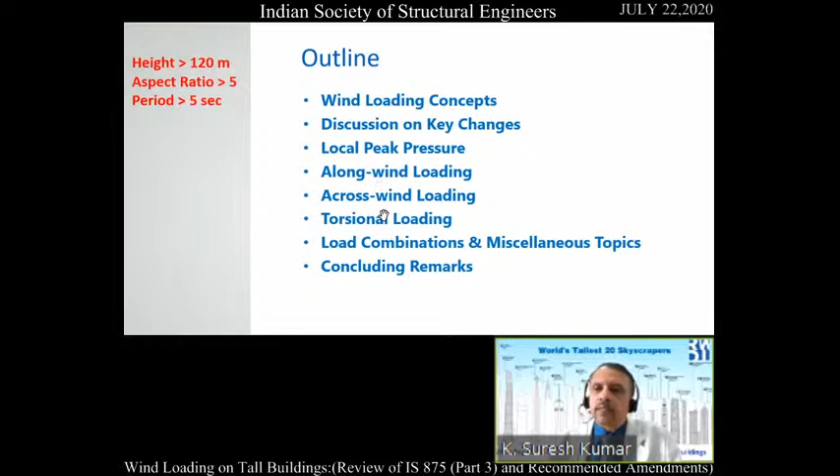So let us start, with all your permission. First of all, wind loading concepts. The code is built based on this particular concept. How do you assess wind loading on any tall building? You need certain things to calculate wind loading on tall buildings, and this is the way the code is built.

You need wind speed and direction, particularly meteorological data coming out of airports. Then you need terrain roughness data in terms of oncoming flow field turbulence. Depending on whether you are in Mumbai city middle or closer to the ocean, the terrain roughness is different, which will alter the loading on your building. This is already addressed in the code, like Cat 1 to Cat 4 terrain conditions with turbulence intensities and profiles.

The final aspect is the most crucial thing, local wind turbulence. There are a number of different turbulences affecting the building, not only the oncoming flow field turbulence, but also something called wake turbulence, which we'll talk more about shortly. We also have self-induced turbulence, which I'll discuss, and motion-induced turbulence, which is more like what we call inertial loading or resonant loading in terminology.

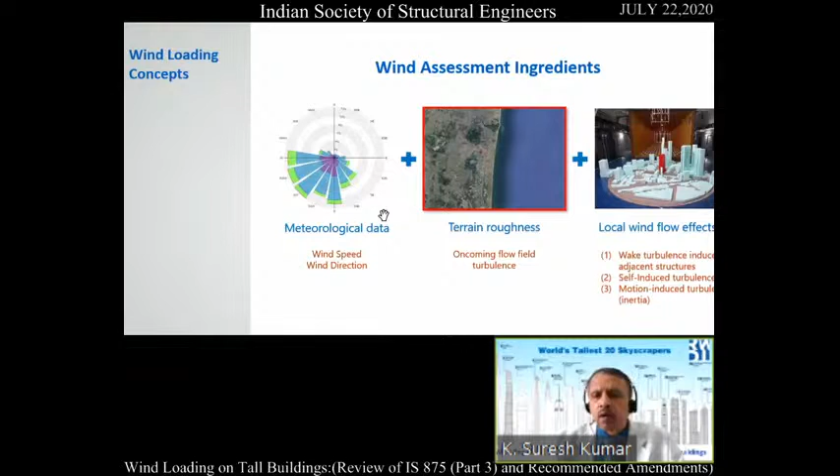So what is wake turbulence? You can look at some of these photos I'm showing on the sides and at the bottom, with the cities written. Nowadays no tall building is coming up without another building beside it. There is always a cluster of buildings, with the building coming in between, towards the edge, or wherever. You can see different cities showing clusters of buildings, with one building coming up in the middle.

So the wake of all these buildings, when wind is blowing, this wake turbulence is affecting your subjected building. That is something very important.

The last photo I am showing is Mumbai city itself, one of the projects we simulated in our tunnel. Look at these equations at the top. You can see PD, which I think you're all aware of from IS 875 - P bar D, the mean reference pressure as well as design pressure with respect to the peak wind velocity. That includes wind speed, wind direction, and terrain height multiplication factor - earlier I said 3 factors. Out of those 3, meteorology and terrain roughness are already accounted for in PD or P bar D.

So local turbulence has to be accounted for using factors like CPE, the external pressure coefficient, and CFZ and G, which are supposed to take care of wake turbulence. CFZ is nothing but the drag coefficient, and G is the gust factor.

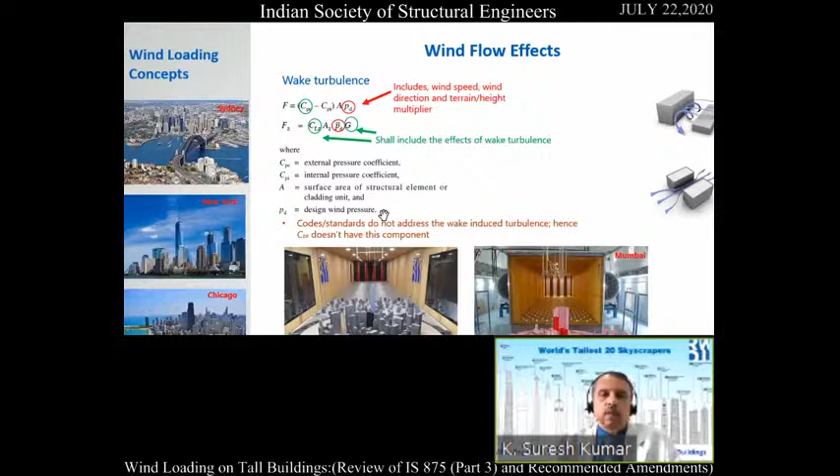Now the self-induced turbulence - what is meant by this? You can see the shapes of buildings coming up: Burj Khalifa getting tapered with steps, Shanghai Tower getting twisted, some low-rise structures with very complicated shapes, a tall tower in Vietnam with lots of steps, and the Statue of Unity, which also has a complicated shape. So the shape is doing a lot of things.

Typically the code addresses standard shapes - squares, rectangles, triangles, familiar shapes. But structures are not happening that way nowadays. Everybody is coming with new designs, so you see a wide variety of shapes, and what these shapes are doing, we don't know.

So can CFZ and G take care of self-induced turbulence? Again, the answer is no - it cannot, unless it's a standard shape. We are missing that in the code; it cannot address that. That is another reason why we do wind tunnel tests.

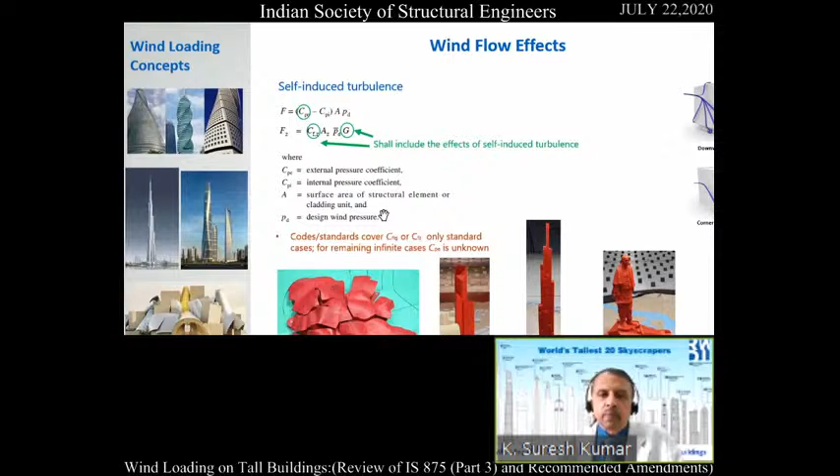The last point is motion-induced turbulence. In the equations, G, the gust factor, is supposed to take care of motion-induced turbulence. But G doesn't only take care of motion-induced turbulence, it also takes care of background turbulence. So you have two components there: background and resonance - this is the motion-induced case. The background is basically the oncoming turbulence case, also taken care of through G.

So essentially what you're doing in the code is calculating the mean load using CFZ, AZ, and PD bar - that gives you the mean loading. After calculating the mean loading, you multiply by G to get the peak loading. It's a very simple equation, and it's been widely used in most codes - we are not the only ones using it. You'll see after a while who else uses some of these equations. This gives you an idea about how the code is built.

So conceptually there are three components: one is meteorology, second is profile, third is local turbulence.

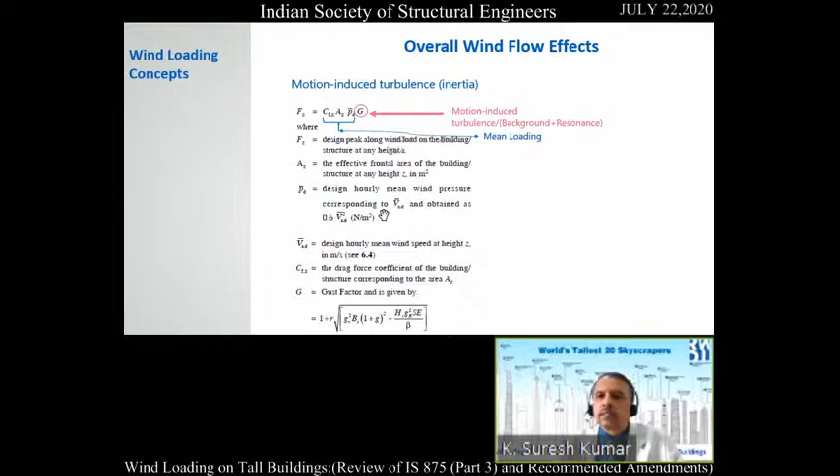So we don't know exactly what is the reason behind that, because I thought we are closely following the Australian code in some of these parameters. Many things currently in IS 875:2015 are coming from the Australian code. So why this difference exists, I can't answer here. This is something we should be thinking about at a later date when we try to amend this code again. So there is a difference between the mean profiles of the codes.

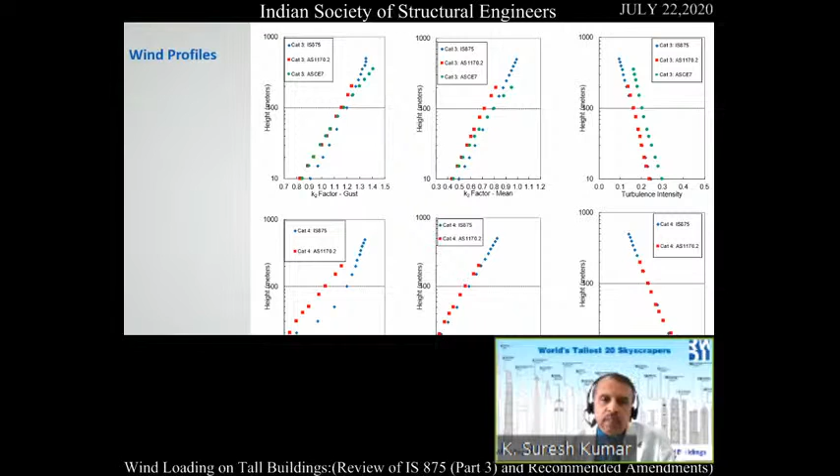So why this is happening is again a question mark, because our roughness length is exactly the same as the Australian code, since we use roughness length nowadays with Z-naughts from 0.002 to 2 meters. 2 meters we are using in Cat 4 terrain. So this is something to be questioned, because this is going to directly affect our reference pressure, which is very important.

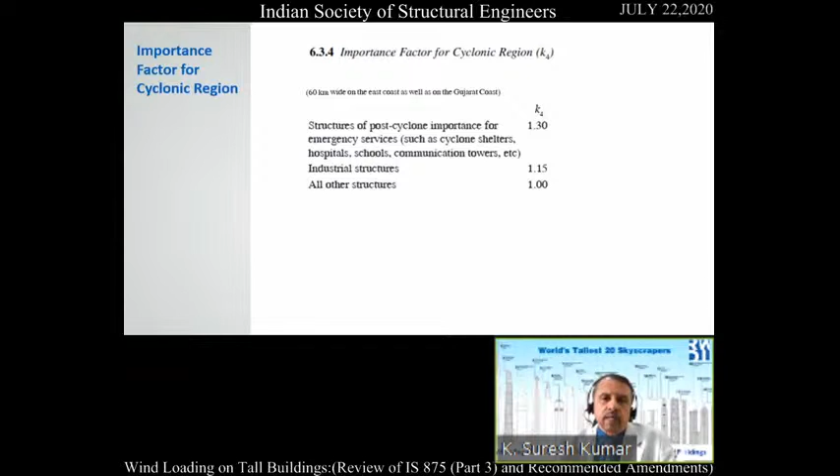And now we also brought in cyclonic factors. I have given another webinar exclusively for cyclonic factors, so I'm not going to get into the details. Basically what we are saying is at the coastal region, we want to elevate the speed using another factor, which is K4. They say that in post-cyclonic regions you increase the speed by 30%, and in industrial structures you increase it by 15%. Then all normal structures is 1.

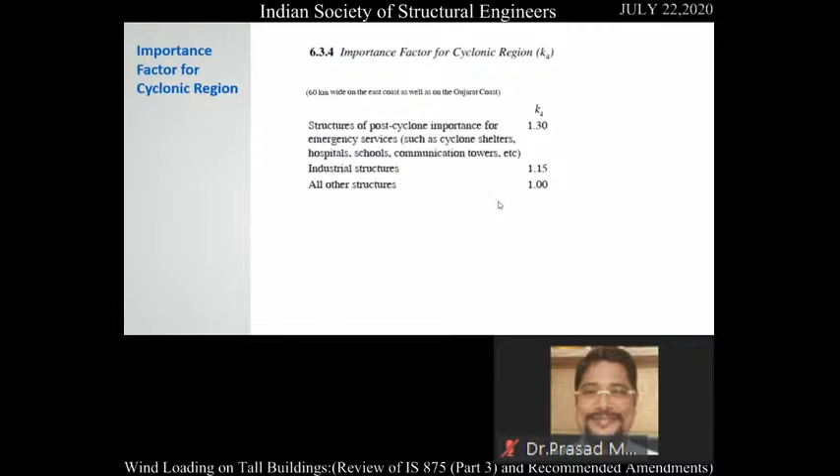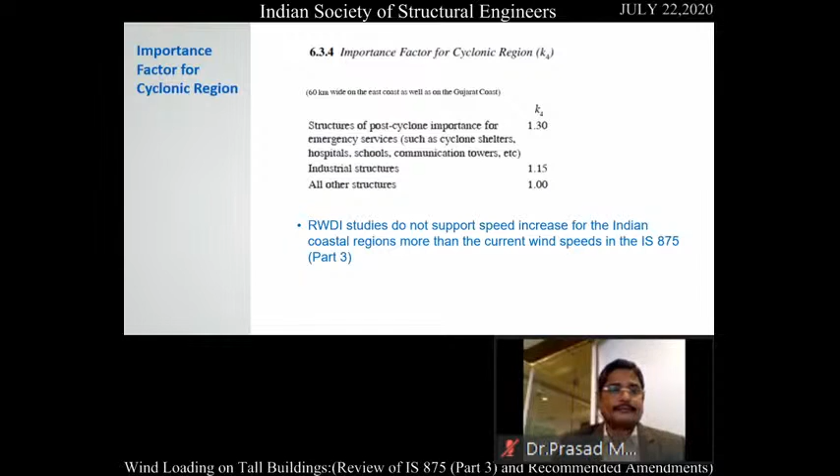So in such a case, we have looked at cyclonic simulations quite extensively, and what we found out is there is no speed increase as per our simulations. We are suggesting that no such increase is required, which is very clearly explained in the last webinar, so I'm not going to get into the details. Basically, our suggestion was to live with the K1 factor rather than bringing in another factor K4 into the picture. This is another suggestion which has already been discussed before.

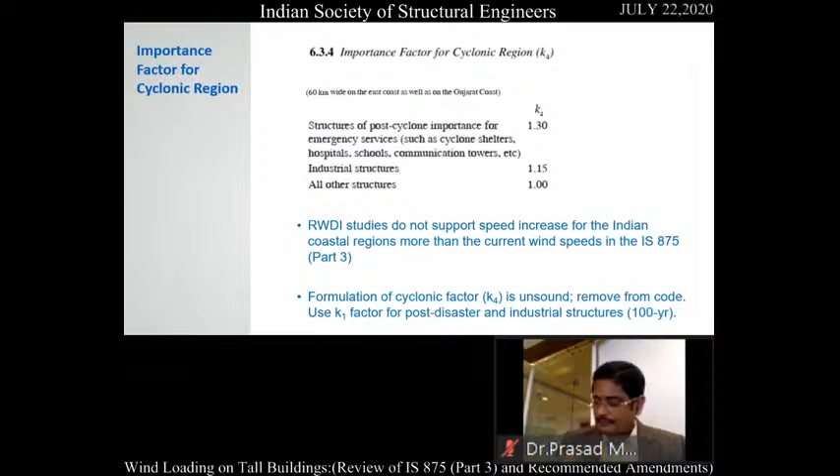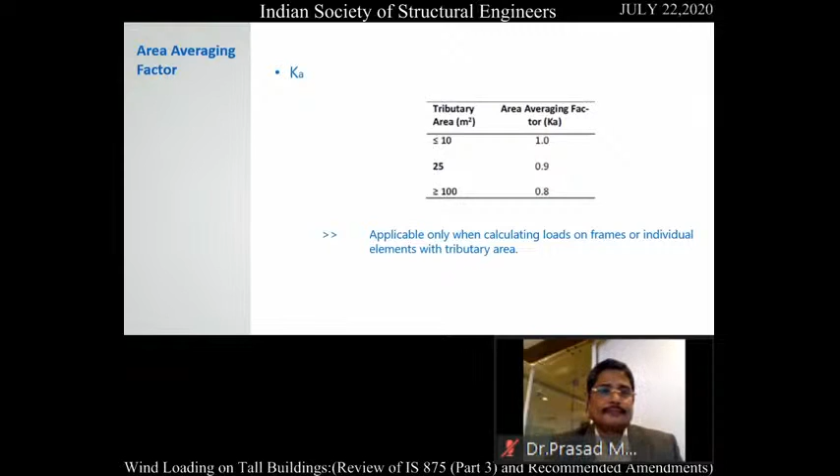And a few other factors coming into the picture, which is the area averaging factor, a table which is already in the code. This is something new. Basically it is applicable only when calculating loads on frames. When calculating loads on walls or with some tributary area, you can reduce the loads, which makes sense, and it is also in the Australian code with exactly the same ratios. So larger the area, lower the load.

Why? Because you have lack of correlation of pressures happening in a very large area. That is the reason we are trying to reduce the load. So this can be utilized when you calculate loads on roofs and loads on walls. It is possible to utilize this particular factor. But we shouldn't use this factor for calculating lateral loads on tall buildings. These things are not clear right now in the code, so probably we want to make it clear next time we do the amendment. That is why I brought this in.

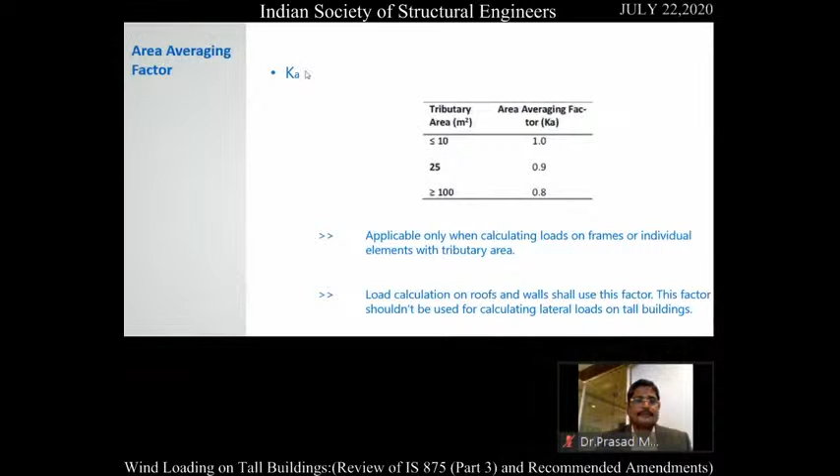Now the combination factor, this is something new that came up as well. The combination factor KC of 0.9 is recommended when combining external pressure with internal pressure. When you calculate loads on walls and roofs, you are combining external with internal. What is happening is the external and internal pressures are not happening at the same time, and again, that is lack of correlation.

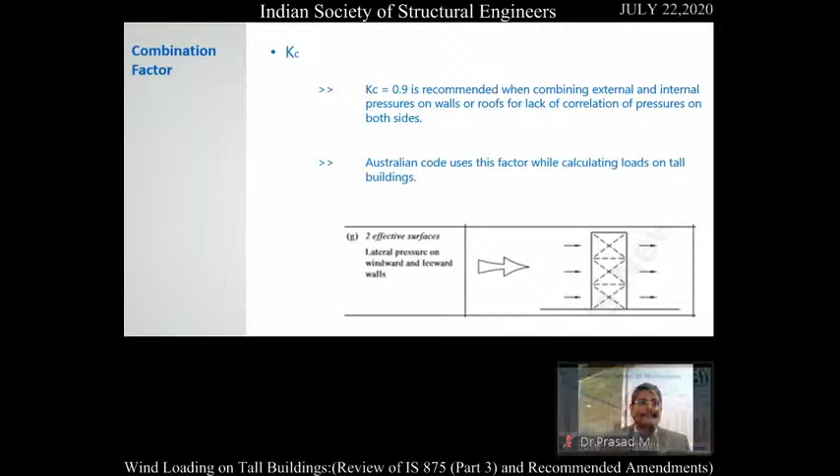So it makes perfect sense to use 0.9, but we have kind of limited it to only this. We didn't talk too much about whether we can utilize this for lateral loading or not. But the Australian code is very clear. They have a big table on KC where the 0.9 can even be applicable in finding lateral loads. That means a 10% reduction is possible. This is something we should be thinking about in the future. I would recommend utilizing this even for finding lateral loads on tall buildings.

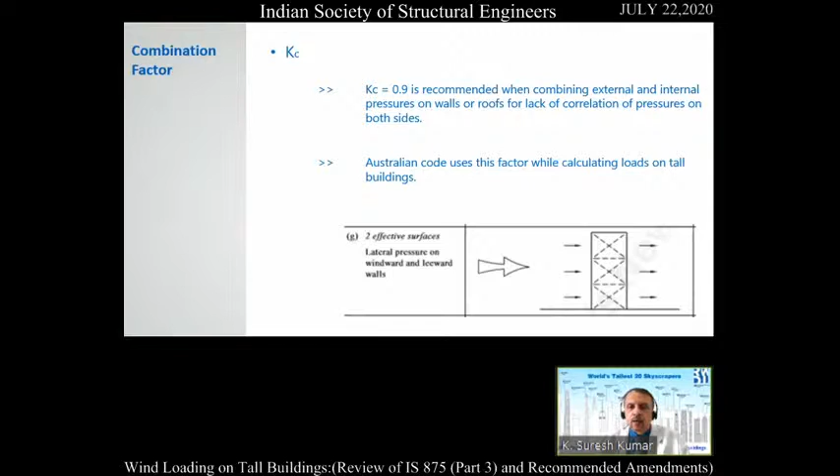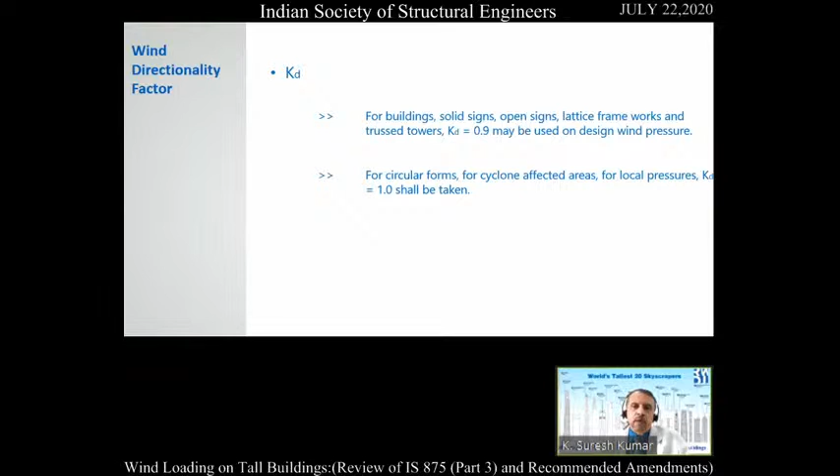KD factor is something new we brought in, and we say that 0.9 can be utilized, whereas the American code uses 0.85. So we said 10% reduction. For circular forms and cyclone-affected areas, as well as local pressure calculations, we should not be using KD of 0.9 — the code is insisting we use 1. I would say this is another area we should be thinking about, and in my opinion, regardless of this, there is still a reduction possible. That is something we should be thinking about in the future as well.

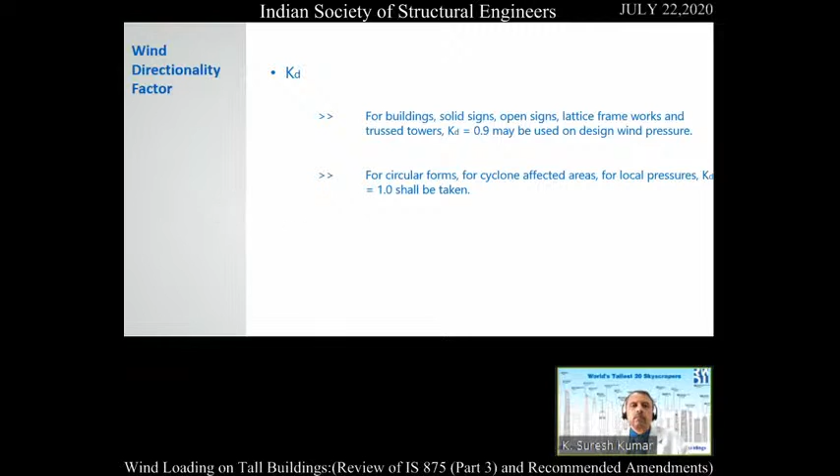Interference factor is something new, again, brought in. I think I got a number of calls on interference factor, accounting for basically amplifying the load because of another building in front of your building.

This is more like wake turbulence. But unfortunately, the trouble here is there are lots of parameters influencing this - the shape of the building, the distance between buildings, the terrain, you name it. There are so many factors influencing it, which is why it is kind of difficult to codify this, in my opinion.

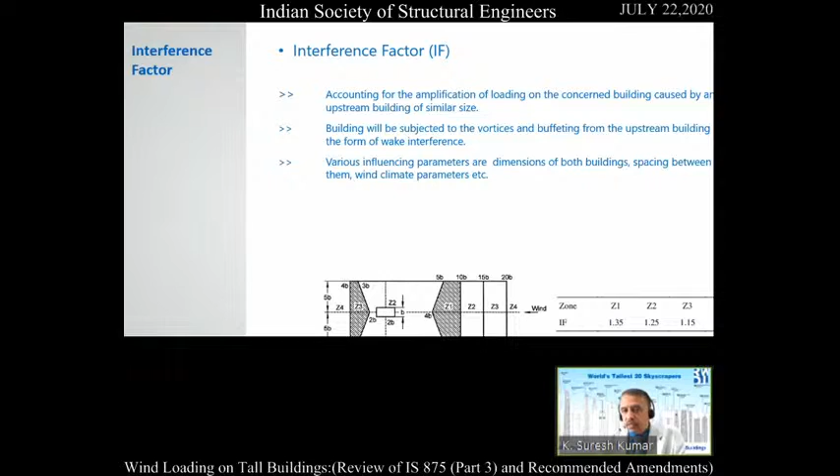Another problem is, in reality, seldom do two tall buildings have interference taking place in the field. So how many times are we going to see only two tall buildings? Very, very seldom. So that is another issue.

The earlier version of the Australian code had this stuff in their code - I'm talking about 1989. Then they moved it to the handbook for reference, basically. So if you want, you can use it, or try to do some preliminary estimations.

But I strongly say that in some of these numbers, which are also in the code, like Z3 and Z4 zones, it is too high, in my opinion, based on my experience with wind tunnel testing. All I can suggest is wind tunnel testing is the only solution to find out the real interference factor. If you use these factors already in the code to estimate loads, I'm quite sure this is going to result in super high loads.

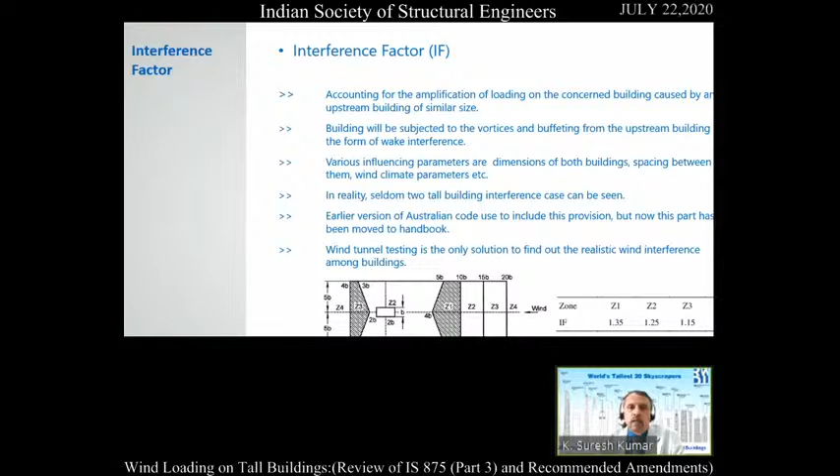Now I move on to local peak pressures. There are a number of things to cover.

My interest is more on Table 5. Table 5 has a local CPE factor ranging from -0.8 to -1.25. We have only one zone, basically, to calculate the peak pressure. We don't have a positive value as well, which is also important as far as framing is concerned, and that's not there in the code.

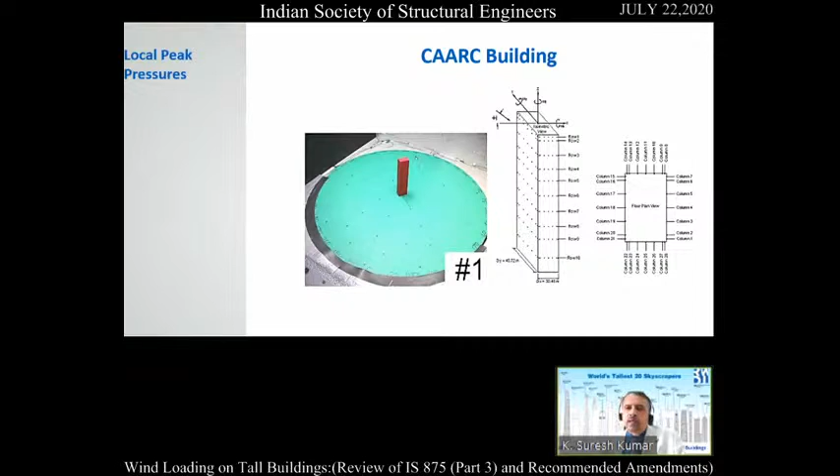We have done some CAARC building model tests - a very standard building model test that has been utilized all over the world. What we found from these tests is that the factors are very high in comparison to the code, especially on edges. We looked at the edges and found values of the order of 1.8, 1.5, even 2.4 - those are kind of isolated hotspots.

I also compared against ASCE 7 as well as the Australian code. The Australian code ranges from -1 to -1.95, while ASCE 7 goes from about -0.9 to -1.8. So they all have two regions, one for the middle, one for the edge. The edge is always subjected to higher suctions.

But unfortunately, in the Indian code, we have only one value throughout the facade. So what this shows is basically that it is underestimating the load at the edges. That is one of the issues we talked about earlier as well.

We looked at positive values as well. When you look at positive values, we are okay - if you use 1.2 positive for the facade, all over the facade, it is good for design, but we have to put it in the code.

We looked at a number of buildings - I'm just showing a sample of 4 buildings. You can see the wind tunnel range versus IS. The wind tunnel range for the first building is from -2.25 to -3 in the majority of places, with isolated spots getting -3.75. And IS is giving -2.23.

You can see the rest of them everywhere - our peak loads from the code are much lower than what is being found from the wind tunnel. You can also compare these values against ASCE 7, and you can see those values are in match with the wind tunnel, or match, or slightly different, but very close.

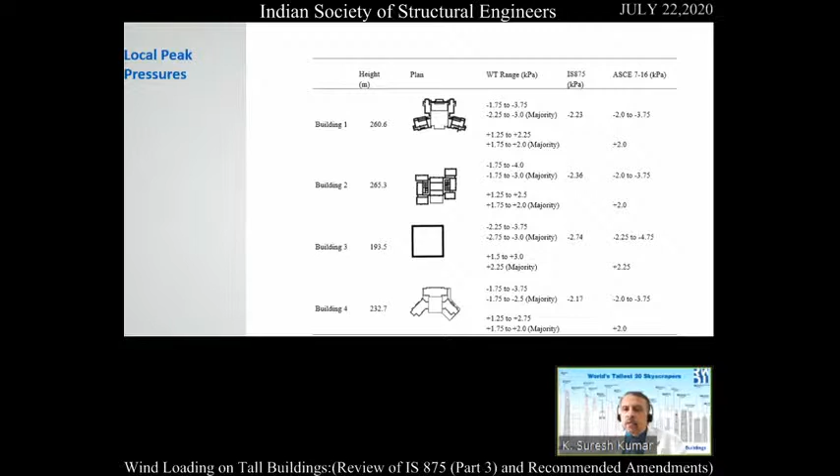So this is the reason why I'm saying the edges are underestimated. The loads are underestimated at present in the code. So we need to bring out another table or introduce a new zone, etc.

So I'm putting an amendment here for you. I'm showing that the positive values we can put from 0.8 to 1.25. The negative, for the general zone, we can put exactly what the code is suggesting right now, minus 0.8 to minus 1.25. But the edge zone, we cannot use minus 0.8 to minus 1.25. We have to go from minus 1.2 to minus 1.8.

That means for tall buildings, we'll be using minus 1.8, which is identical to ASCE 7. We have all the proof. We are not going exactly equal to the Australian code. Australian code is even higher, at minus 1.95.

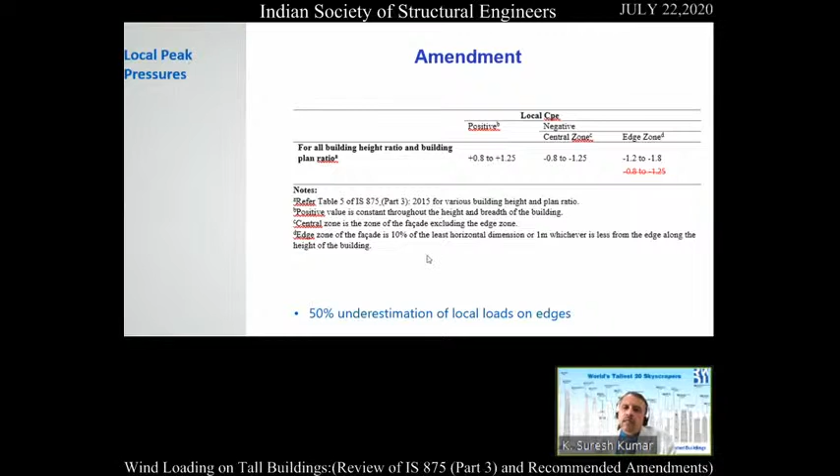We probably don't have to go there, but we have sufficient proof for this. And what the edge zone means is approximately 10% of the least horizontal dimension or 1 meter, whichever is less. So the closest edge is something debatable, which we can discuss later. Probably I don't want to discuss too much at this point. The point here is the edges are already underestimated in the code.

Now I move on to along-wind loading. So now we are getting into the structural aspects of the presentation. Along-wind loading basically means the wind is pushing the building, which is oscillating in the direction of the wind.

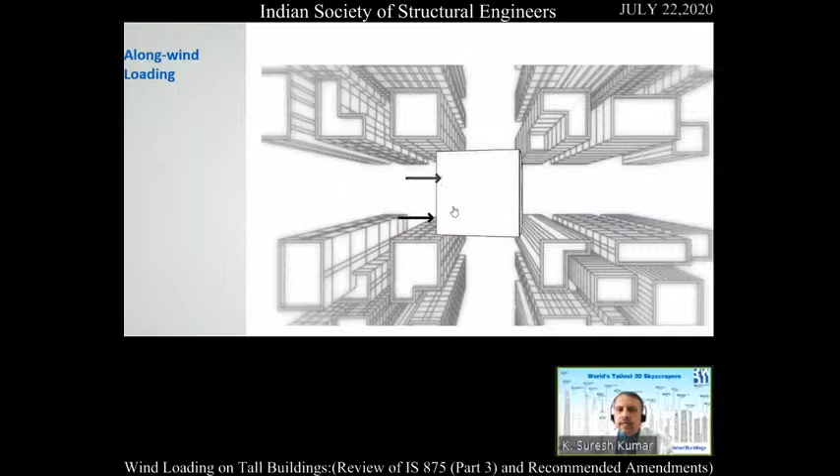There are three components: mean, background, and resonant. The background and resonant are the fluctuating components, and this is the mean component. The code is built basically according to this equation: gust factor equals peak along-wind loading divided by mean along-wind loading. Very simple. So once you find the mean along-wind loading, just multiply with the gust factor and you get the peak along-wind loading. It is as simple as that.

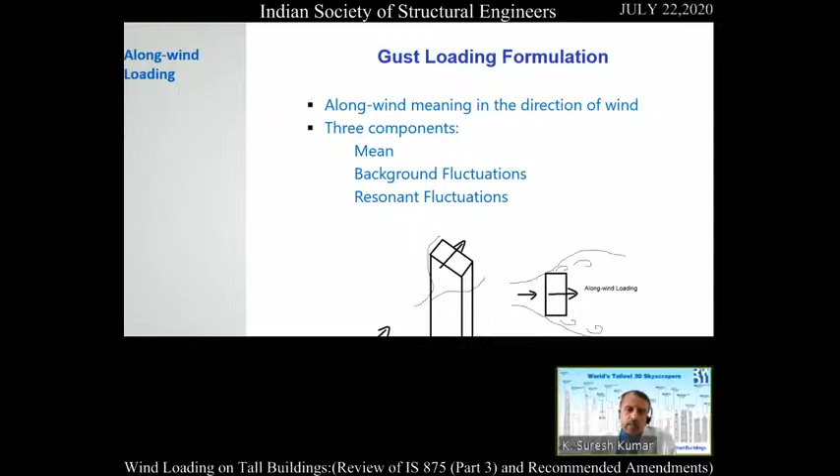So there is a great initiative, great formulation, there is no doubt. Look at how we are working closely with other codes.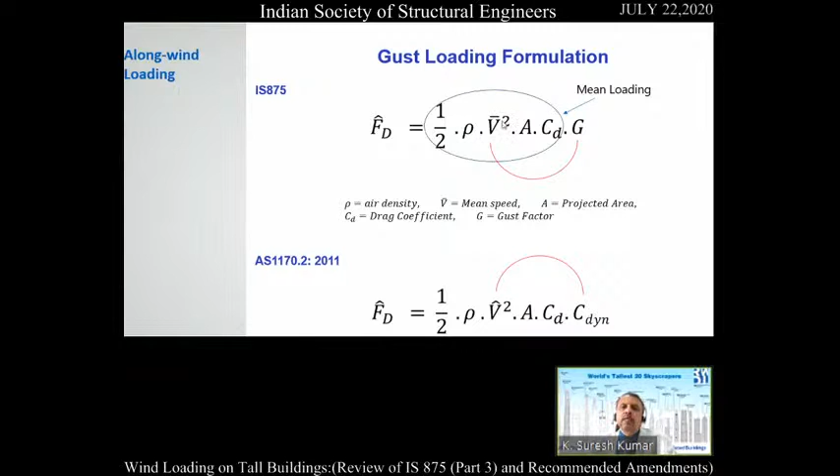The rest of the parameters are all the same. CD is supposed to be the same, even though there are differences, which is coming very soon that we'll be discussing. But essentially, the formulation is identical. There is no difference whether you use mean hourly speed or 3-second speed, but you cannot mix it easily. If you want to use this particular equation, take your V bar, convert it to V peak, then you can utilize this equation and still get the same answer. Or you can go backwards, just do the wind speed conversion, then utilize that particular equation.

This is probably the most important stuff from this presentation: force coefficient. This is figure 4 from our code. We went ahead and did even H by B infinity, H by B 20, etc., all the graphs. You can see around this region, A by B 0.5, 0.6 region, it is getting super high numbers, and these are very high CF coefficients.

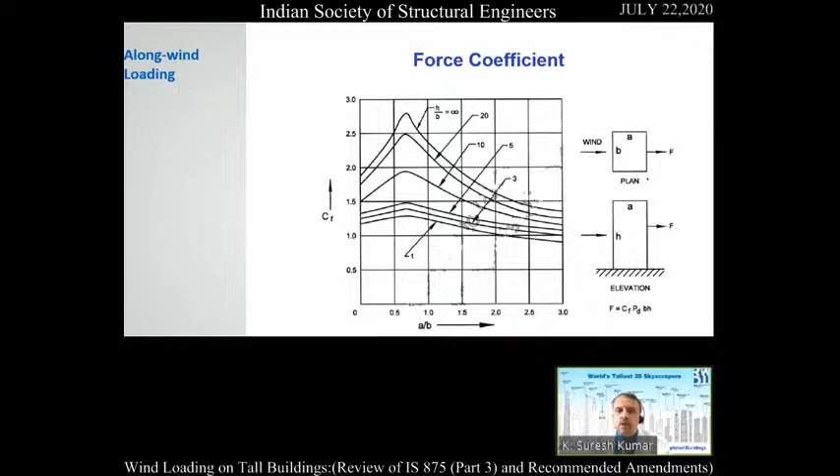This is not occurring in reality because we have been testing buildings for the last several decades. We have tested buildings up to aspect ratio 23 so far, and we have never seen anything like this, any coefficient behaving like this. So we have to immediately look at this, because otherwise we'll be overestimating loads, especially along wind loads on tall buildings. That is why I brought this stuff into the picture.

You can see what the Australian code and ASCE are doing. You can see H by B for all scenarios, and here height is limited to 200 meters. With A by B, the plan ratios, you can see the maximum is 1.3. That seemed to be a really good number, because based on the testing that we saw, also 1.3 is ultimate. You cannot get more than 1.3.

Unless you are super slender, or getting into 2D flow with no turbulence in mean uniform flow or something, there is a chance you can get higher. But otherwise, in boundary layer flow with normal H by B even up to 23 - and I'm telling you, 23 is the ultimate we have tested - you cannot get more than 1.3.

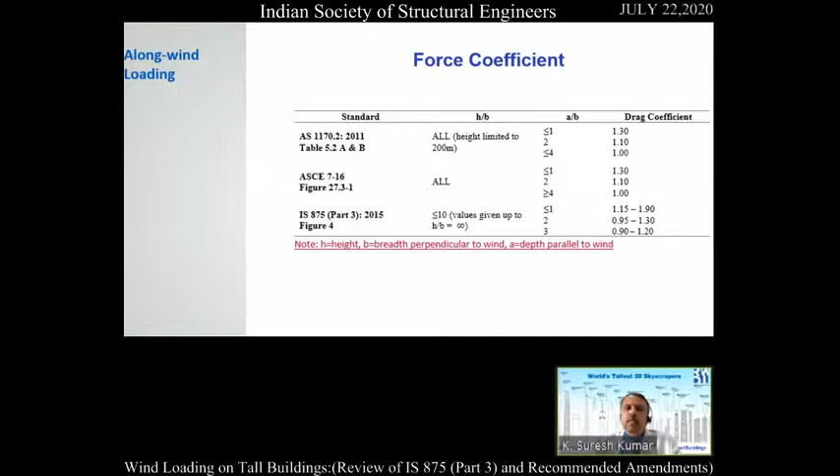So IS 875, look at where we are. I'm just putting only less than 10. If you go more than 10, what will happen? You can see from your graph itself, it is getting super high numbers. I think this is something we should be attentive to, and we should be changing this immediately.

I'm also putting another graph. This is a bit theoretical here because of the G. I'm focusing on the G. The gust factor has two components, and I want to focus on those two: one is background, another is resonant. It's very easy, we don't have to think about each parameter. Background is oncoming turbulence, and resonant is the inertial component, meaning the structure is interacting with the wind, pushing back and forth. That is what this resonance means.

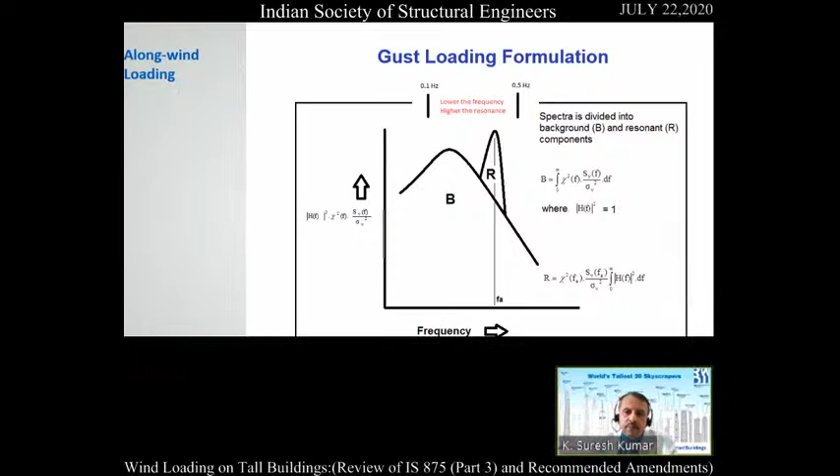Look at the gust factor equation between IS and Australian code. The left-hand side of IS 875 is background - oncoming flow turbulence and some self-induced turbulence - part of this equation. The right-hand side is resonance, motion-induced turbulence. If you look at the Australian code, it's exactly the same equation. The only thing is they have 1 + 2 G v I h on the other side.

Why do they have that? Because they are using peak 3-second speed for their calculation, while we are using mean hourly speed. They are using peak speed, so when using peak speed they should use that term. Essentially, underneath, there's an equation saying G is nothing but C dyn into 1 + 2 G v I h. So it's an identical equation - we don't have to worry about that. The only difference is we use mean hourly speed and they use 3-second speed.

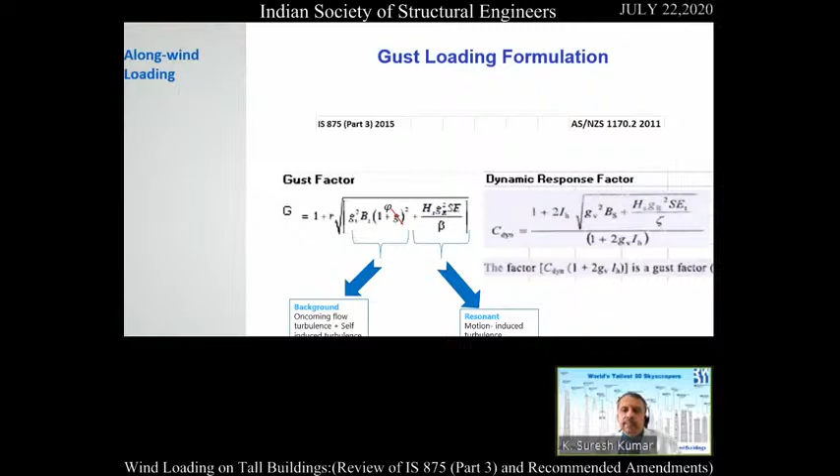So we don't have to worry too much about these equations. It's almost identical. Of course, there are some differences which I can't say why we made different - that's probably something we should discuss at the time of amendment.

There's an example for you: two buildings side by side, in Chennai, a fairly rectangular building. You can see what we got out of the wind tunnel - the wind tunnel numbers have an underline in red. Then you can see the IS 875 numbers, also underlined in red. You can see the wind tunnel result is slightly lower than IS, and that could be due to the surrounding structure, sheltering.

But look at the comparison between the codes - it's almost identical. So we are getting relatively similar numbers between the codes, which is great, as far as your CD is similar. If your CD or CF has a problem because of figure 4, then obviously this is not going to happen. So the formulation is all okay - we need to fix the CF.

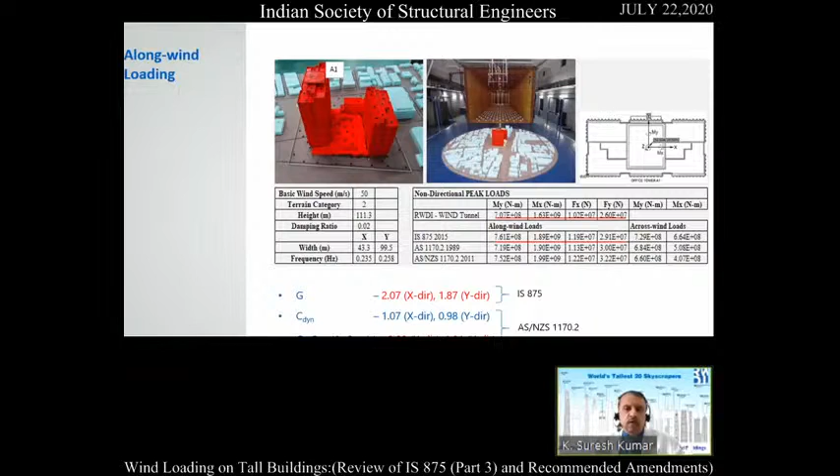Once you fix the CF, we are going to get identical numbers regardless of which code we use. I'm also putting the G from IS versus the G from AS - you can see again similar numbers. So we don't have any issue with the formulation of along wind, except slightly few differences here and there. Our problem in along wind is purely with CF, so that CF needs to be fixed.

Now the more interesting stuff on crosswind. This is something new which Dr. Prasad already mentioned in the code, and again we borrowed a number of things from the Australian code. So what is meant by crosswind? When the wind comes and hits the building, you get vortex shedding on both sides of the building, and as a result you get a crosswind oscillation. So in certain buildings, crosswind dominates and along wind is much, much lower. I can tell you, in certain cases, crosswind can be double or even more than along wind. So we need to be careful about the crosswind.

So the code came up with diagrams picked from the AS code. And when we tried to compare, I was being informed that we are continuously getting higher loads from the IS diagrams. That is when I compared and found out that the graphs have been shifted.

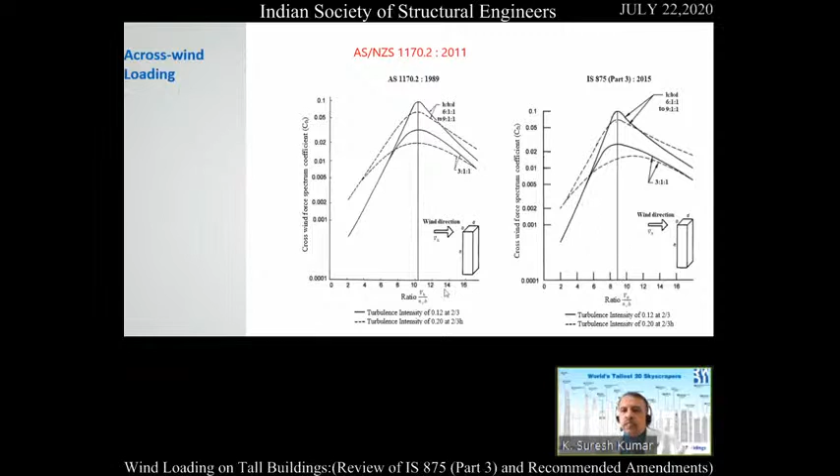You're supposed to get a peak at about 10, but we are getting a peak at below 9. As a result, we are getting too much higher load because our building lies between the 2 to 6 or 2 to 8 ratio region. Unfortunately, because the graph is shifted, we are getting a higher cross wind force spectrum coefficient, and that is causing the higher loading.

The interesting thing is, I do not know why, when we already have the 2011 code version available, we went back to the 1989 version and picked the graphs. That is something to be discussed, because we could have easily used the 2011 version code equations rather than these graphs, because these graphs are very dangerous. They are in log scale, and depending on the day and who is doing the calculation, you can come up with different numbers. That is why it is better to use equations rather than graphs.

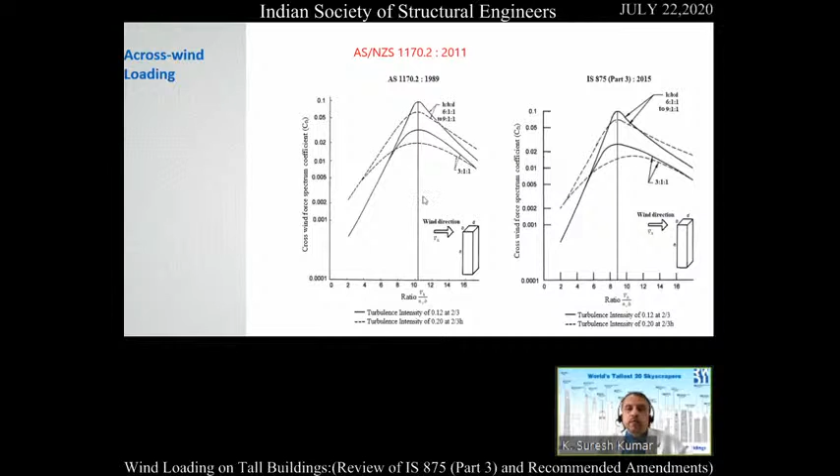We looked at a case, from Mumbai. This is a square building, approximately 160 meters tall. You can see the red line - again, the crosswind, IS crosswind versus the moments compared from the wind tunnel. It is double, more than double.

Then you compare the AS values underneath the red line, and you can see it is very, very close to the wind tunnel. Because this is more like a textbook type problem - you have a square structure without balconies etc. - you are supposed to be almost equal to the code. Of course, if some upstream structure is obstructing the flow, you're going to get different numbers, I agree. But otherwise, you should be getting very close.

So it is very clear why this is happening, because using the same equations from the same 1989 graph, I get very close numbers compared to the wind tunnel. And the same graph is used in IS 875, but just because it is being shifted, we are getting a higher number. But I'm not going backward on the 1989 version.

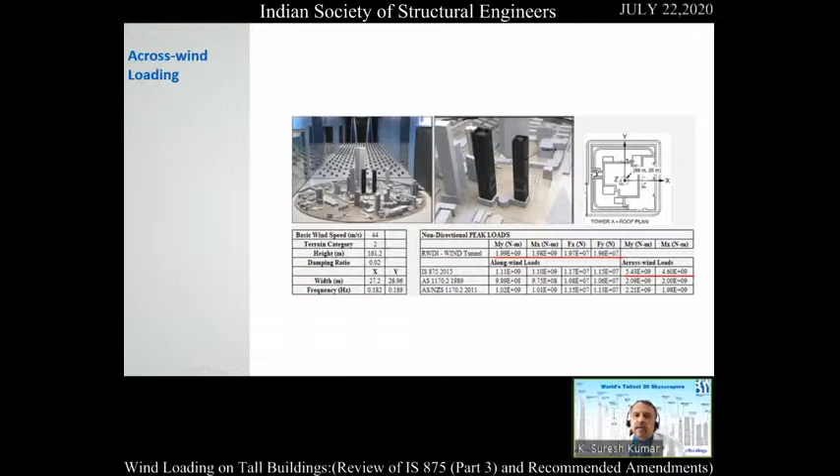I want to go a little bit forward and look at whether we can use the 2011 version of the code instead of the 1989 version. We can, and I am proving it right here, using the equation for across wind base overturning moment from the IS code versus the AS 1170.2. You can see a one-to-one comparison can be made.

You can see the pH is nothing but in their equation - this whole thing is just pH. And 3 by K plus 2 Km is nothing but 1.06 minus 0.06 K. So essentially, these two equations, 1 and 2, are identical. There is absolutely no difference.

So why can't we then use those equations instead of the graphs from 1989? Then everybody is going to get the same answer. Vn, which is the reduced velocity, Vh bar is nothing but V design divided by 1 plus GVIH. I'll leave it for your thoughts, and these presentations will be available.

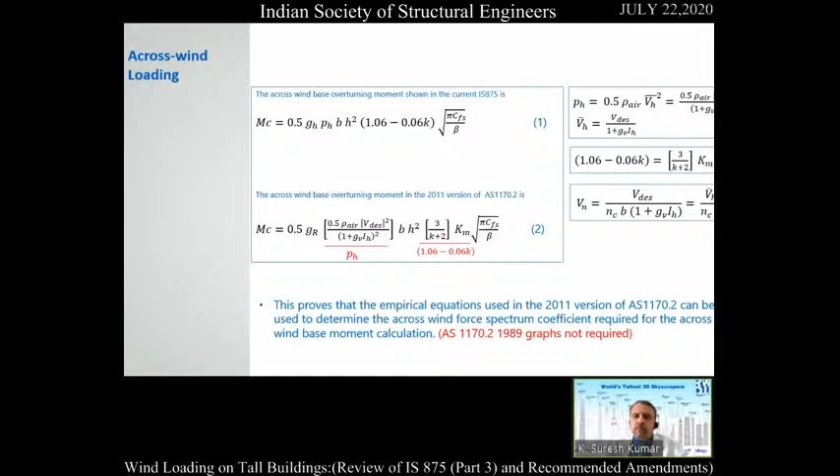You can go back and check these equations and try to comprehend them yourself. I'm 100% sure that you could utilize those equations, and those equations are beautiful. You can just plug in the numbers for Vn, and then immediately you'll get your CFS, and you can continue with your computation.

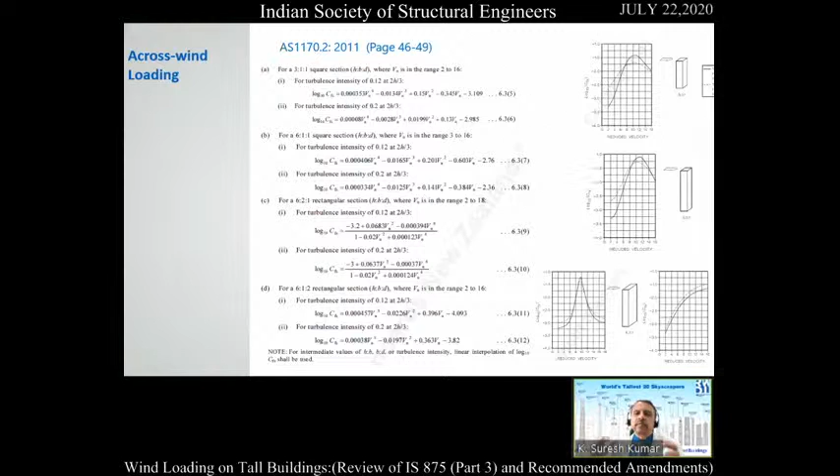These things are perfect, but I wanted to remind you - how many buildings are going to be rectangles and squares? That is a question I think we need to really look into, because every time you have a building with offsets, balconies, insets, and all of those things, all you're doing is taking Bx and By and plugging into this equation to get a CFS. But the wind is not going to probably be so forceful in those cases.

So look at a case - I wanted to also show some cases. Some of these buildings are really tall, 500 meters, 364 and 275 meters, with some interesting shapes. And in these buildings, if I use BX, BY and calculate, definitely I'm going to get crosswind. But aerodynamically, there is no crosswind on these buildings - basically along wind is governing just because of the shape.

So what I wanted to write in the code, or suggest for the code writers, is that depending on the shape, things are going to be different - it's not going to be the same. Another thing is immediate surroundings. Buildings don't come as single buildings, as you know, with lots of other buildings surrounding them. Then again, it will disturb the vortex and disturb the flow.

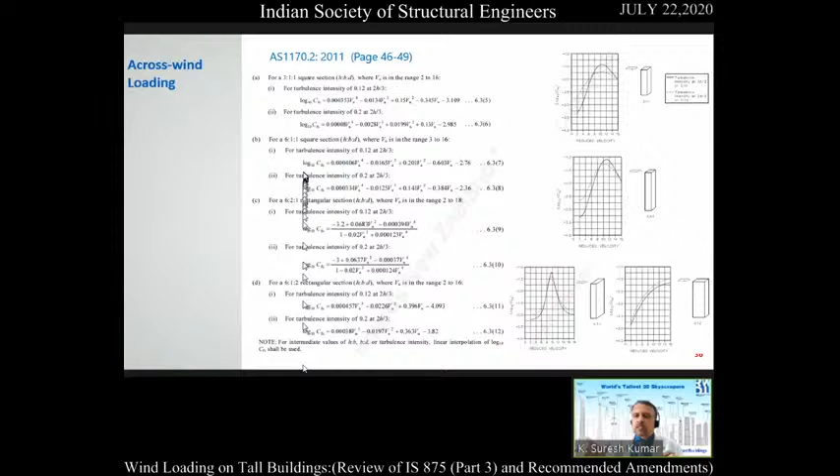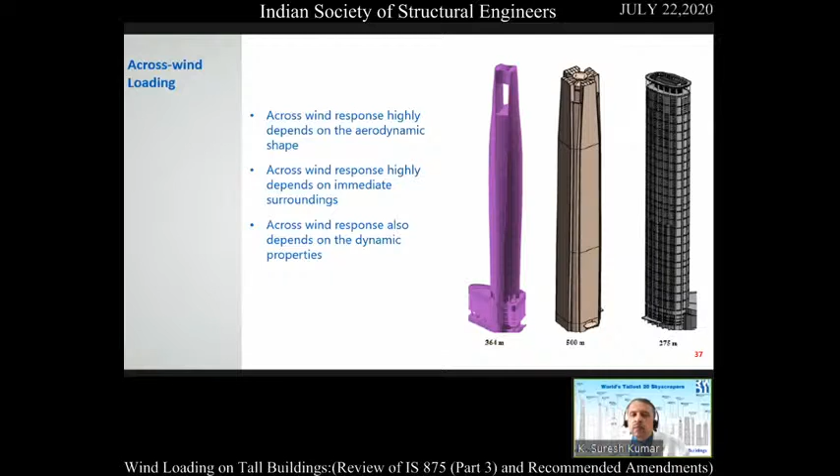And as a result, your crosswind is going to go down. Dynamic properties have an influence too. So I want to caution you, when calculating crosswind, you have to account for the shape, the surroundings, the properties, and then make a judgment call, which is kind of difficult. But we should not worry too much about those numbers. We wanted to comprehend more than those numbers and what could have been really happening in the field.

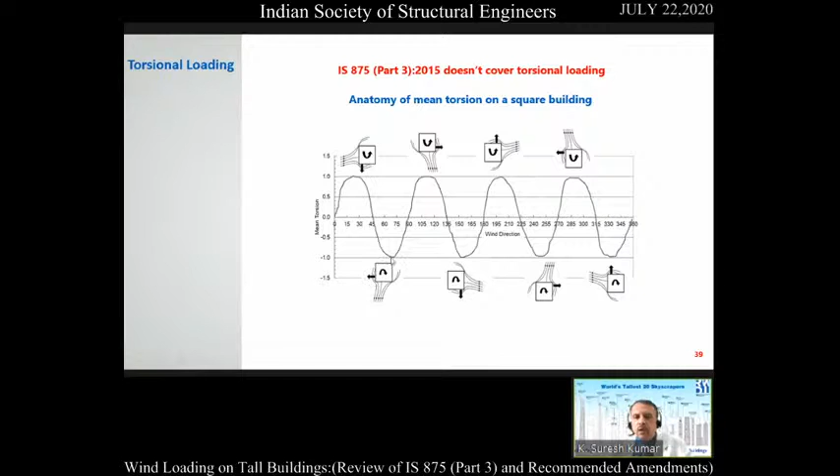Now, torsional loading. IS 875 is silent on torsional loading. I'm showing a graph of mean torsion happening on a square building. At a particular angle of attack, sharp separation happening at one corner tries to twist the building, giving positive torsion. When the flow comes from another angle, the separation happens at another face, and it alternatively twists in the opposite direction. It keeps going like a sinusoidal wave.

Basically in torsional calculation, the torsional eccentricity is a prime parameter. As buildings go from square to rectangle, the torsional eccentricity increases further, and your loading increases. Also, an L-shaped building, or a building surrounded by another building, will alter the flow and you can get a higher eccentricity.

I'm showing an example below with different buildings. From internal tests, we are getting eccentricity between 9 to 12% in these particular cases.

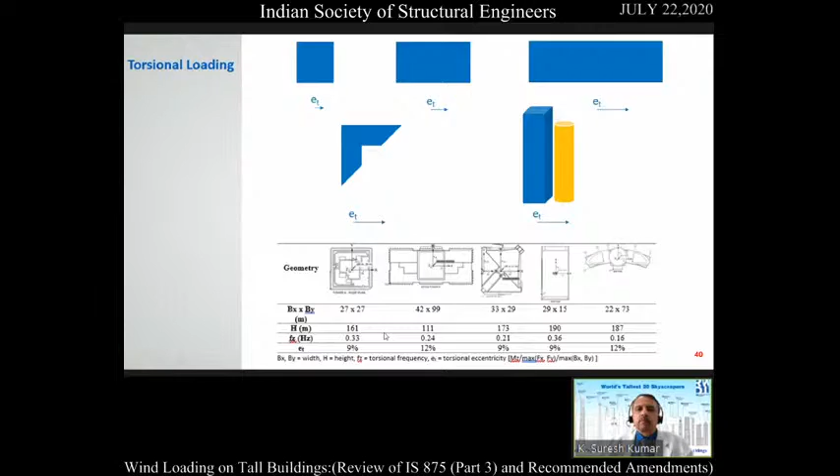You can calculate torsional loading with a simple equation. Take the maximum shear, Fx or Fy, multiply with the maximum Bx or By, which can be averaged throughout the height, then multiply with an eccentricity percentage. Based on my experience, that percentage varies from 5 to 25%, based on number of tests over the last several decades.

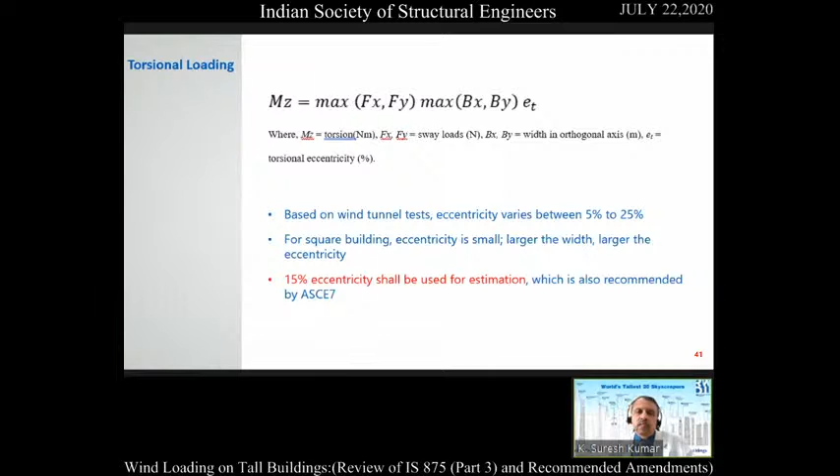Typically for a square building, eccentricity is small, and as the width gets larger, it increases. But we can't be playing with these things at the preliminary stage, so I would propose using a 15% eccentricity at the preliminary calculation stage, which is also suggested by ASCE 7.

Now the last bit: load combinations and some miscellaneous items. I'm showing ASCE 7, Australian code, and Indian code. In ASCE 7 diagrams, case 1, case 2, case 3, case 4 — in some cases they apply load only in one direction, 100%. In case 3, they use 2 sways but at 75% each. In case 2, they use 1 sway with torsion, with certain percentages. In case 4, they use 2 sways simultaneously at 56% with 100% torsion. This is very similar to what you'd get out of the tunnel too.

But I wanted to remind you that wind is not going to act like case 1, case 2, or case 3. When wind blows against your building, it definitely causes X loading, Y loading, and torsion loading simultaneously. The only question is on what proportion. That is what we need to answer, and we'll talk about that in a bit.

The Australian code says you separate the mean, then combine the fluctuations—the crosswind fluctuation and the along-wind fluctuation—take a square root of that, and add to the mean. Without torsion, that's the load combination they suggest.

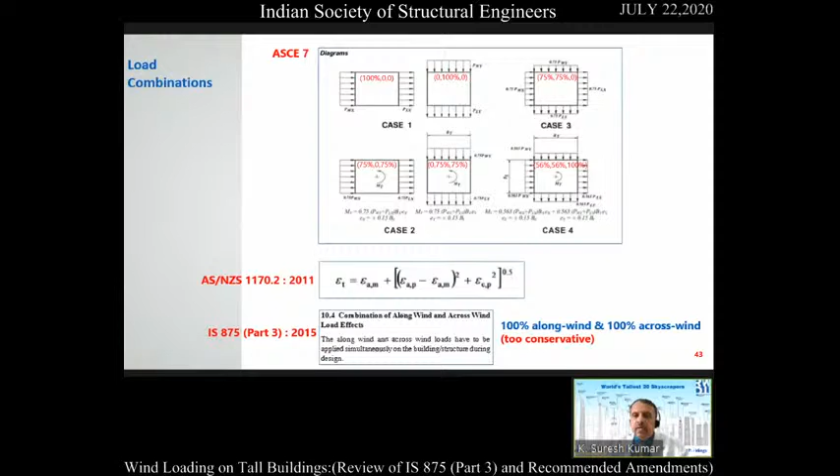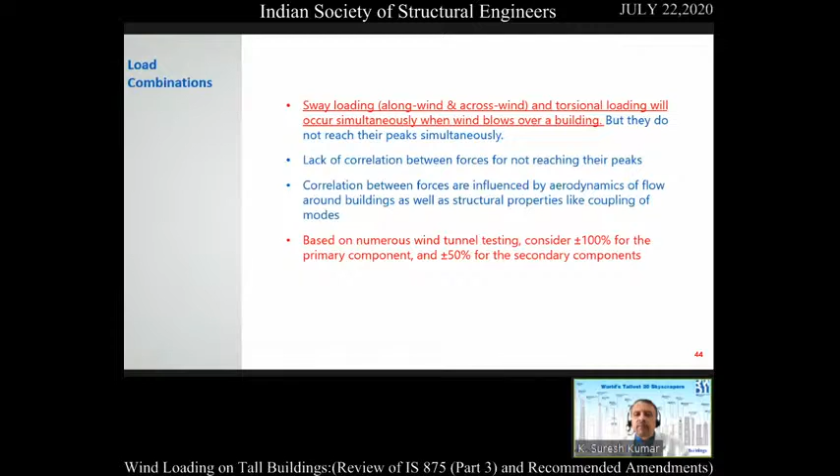Some of these points are written here: lack of correlation between forces at different directions. This is the point we want to raise. We have been testing buildings for the last several decades, and we have found ratios ranging all the way from 30% to 70% in some cases. But I would recommend using the primary component at 100% with 50% from other directions as secondary components. As a first-cut scenario, when you do the wind tunnel test, the secondary components can probably range anywhere from 30 to 60% or so.

A few more things. I wanted to stick with the time, not to exceed the time too much. So structural damping - there's a lot of confusion in this.

Depending on the code you look at, and depending on serviceability or strength and ultimate, etc. ASCE 7 now, as you know, 700 year to 3000 year return period, 300 year to 3000 year, suggests that for ultimate damping we can use 2.5% to 3%. The Australian code is very clear: RCC is 3% and steel is 2%.

Then with IS 875, you can see RCC is 2%, and steel is separated into bolted steel and welded steel. They also suggest pre-stressed concrete at 1.6%. In RWDI, we have been utilizing RCC at 2%. For this case, it's 50-year or 100-year return period, composite at 1.5% and steel at 1%.

And in serviceability also, there is confusion. Various numbers I'm proposing are here, like ASCE 7 and Australian standard as well as international. IS is kind of silent on that, and RWDI uses basically RCC 1.5%, and steel and composite we always use 1% as damping.

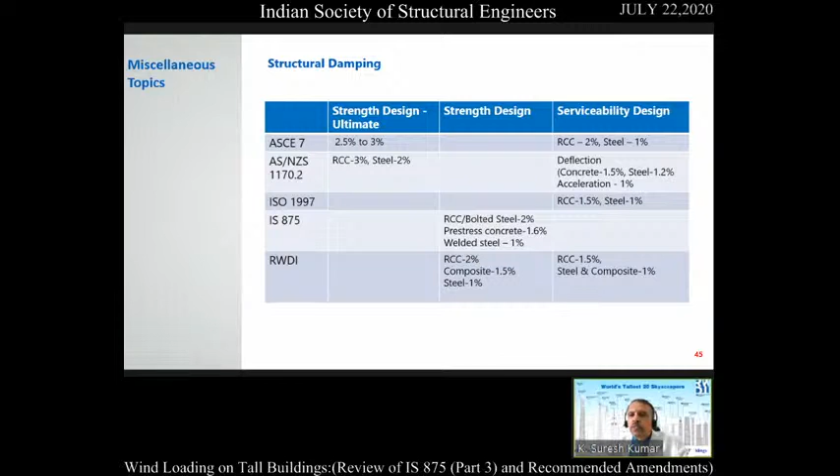Return period is another confusion that comes in. What is return period? I believe that itself is a confusion for many people. When we say 50-year return period, some of us will think that this storm is going to appear only once in 50 years. That is not correct.

What that means is a 50-year storm means the chance of occurrence of that storm in any given year is 1 by 50, that is, 2%. That means this storm can happen or cannot happen - there's a 2% chance it can happen or exceed, and it can happen a number of times this year too. This is a probabilistic term, so we have to think in a probabilistic way.

So for strength design, ultimate return period, ASCE 7 is using 700 years. Australian is using 1000 years for strength design, but their factor of safety is 1. Then with American code and the rest of the codes, including us, we use 50-year return period, then apply a load factor of 1.5 or 1.6 depending on the code, even 1.4. This is traditionally how it's happening.

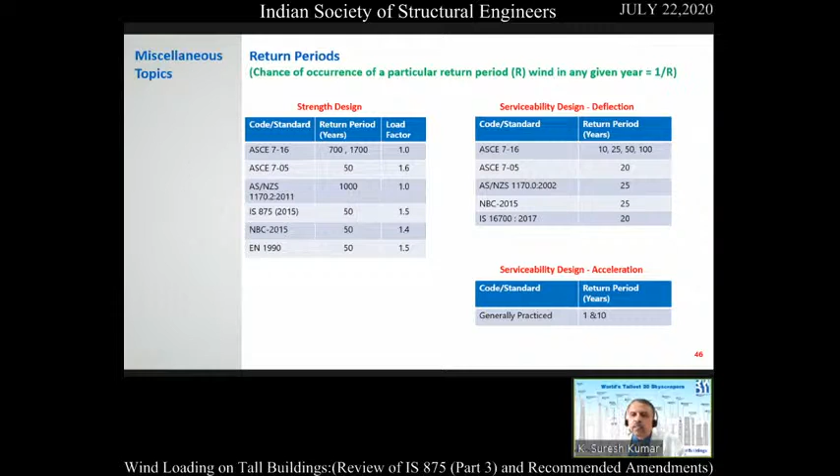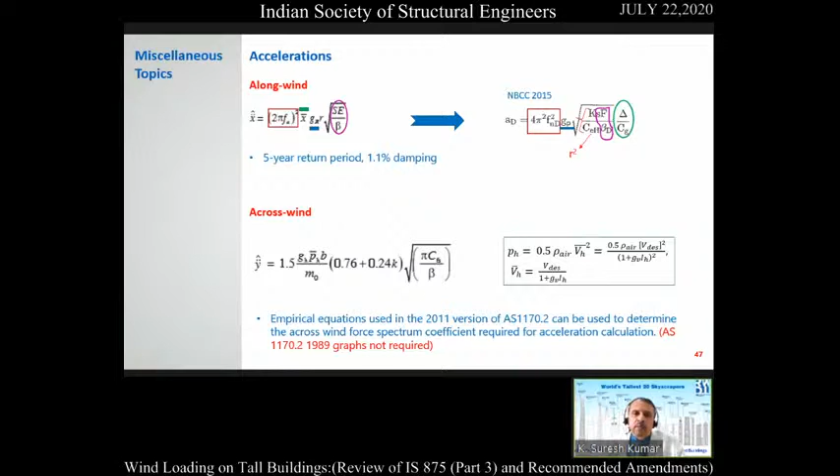The 5-year return period and 1.1% damping is something we need to address, because we want to put 1 and 10-year return period, and the damping needs to be changed to 1% to 1.5% depending on the structural material. Crosswind is directly picked out of the Australian code, and we can use equations, not the graph - I'm underlining, no graphs, only equations that can solve all our problems. The current problems are all not going to go away depending on your structural shapes, which I think all the codes are on the same page about, because we are no different than the rest of the codes.

I'm almost at the closure now - concluding remarks. Basically, wind profiles need to be updated. I told you the profiles seem to have differences between the codes, so we need to address that at some point, because sometimes we could get mostly higher reference pressure, it looks like, and I don't know the reason behind that, but we need to address it.

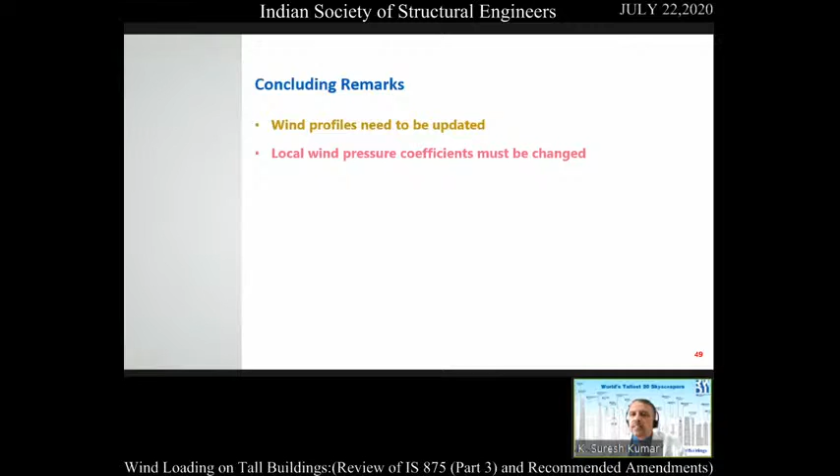And then local wind pressure coefficients must be changed. I told you the edges are underestimated - we have values much lower. We need to be extremely careful, otherwise the windows at the corners can be underestimated in design.

The appropriate force coefficient is another issue. We are overestimating that because, as you know, in the A by B range around 0.5 to 0.6, it is quite high. So we need to address that.

There is lots of information out there, and it is very easy for us to address that. But we have to do it ASAP, because otherwise we keep using those numbers from the code.

I would say the interference factor section shall be removed, because I don't see much benefit for those sections. We can put it in some guidelines or a handbook if we have one, but not in the main code, because this is getting kind of confused.

And if you want to put it, I would say at least you put some reasonable numbers, because I personally feel the Z3, Z4 sections have super high numbers.

Equations corresponding to a crosswind force spectrum coefficient shall be adopted. It is very clear, already proved that it can be used, and you should also try it out yourself.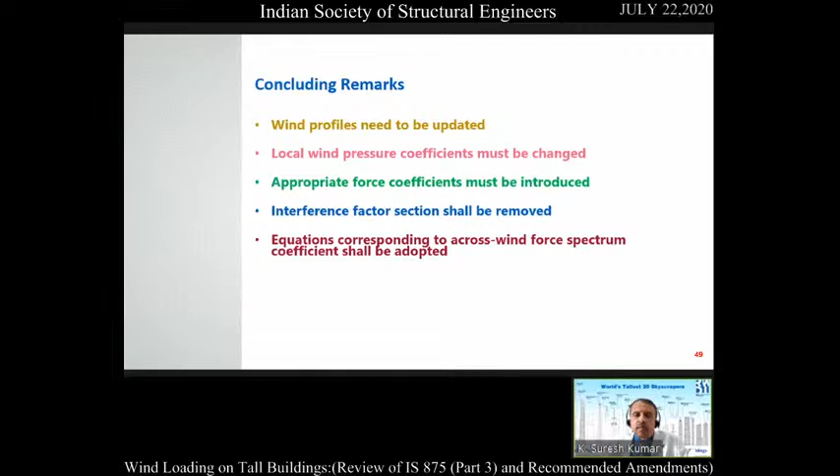I mean, you don't have to listen to me, what I am saying. You can do it yourself and get confirmed whether it can be utilized or not, and go through this presentation again with the equations present, and digest those equations.

Torsion loading must be introduced, and we don't have to wait for other codes to introduce it. We can introduce it ourselves, and this is all known. Some codes have already introduced it, so we don't have to wait for all of them to address this. This is a true loading, and we need to address this loading.

The last one is load combinations. It shall be introduced very clearly so that there is no confusion, and we can all enjoy appropriately combining the along wind, crosswind, and torsion loading together.

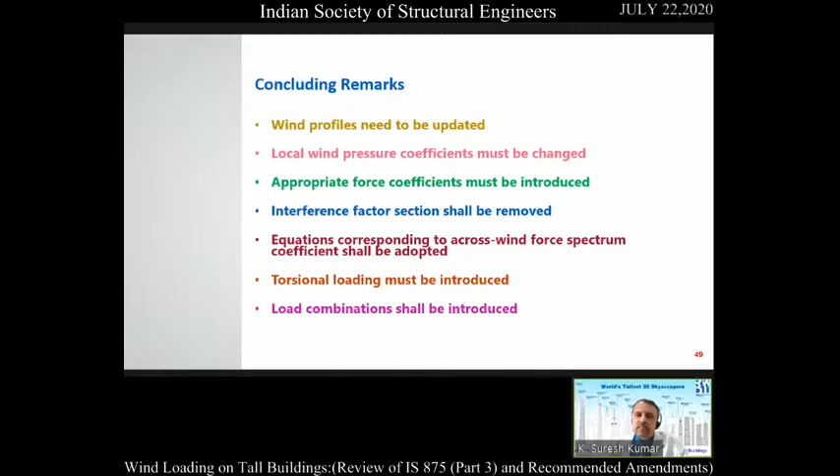I think I got some questions already yesterday from some of the viewers, so I have been answering those questions already. Knowledge is for sharing, and that is what we are trying to do here. No offense to anybody.

Some of these numbers are real numbers, you can go back and check it. We wanted to better our code for the users and try to do a good job there as well, so that we can say our codes are robust and things like that. Thank you very much.

Thank you, Suresh, for your insightful presentation and coming up with specific suggestions.

It is important for us today to note that Dr. Suresh's talk is based on numbers obtained from practical case studies with different plan aspect ratios. He also compared the numbers with different codes and wind tunnels. So here, actually, the numbers are speaking for themselves.

As structural engineers, as structural designers, we are ultimately interested in the total base shears in both directions, the base shear moments, and the torsion. So today we have an interesting presentation where Dr. Suresh has come up with practical case studies compared comprehensively with different codes.